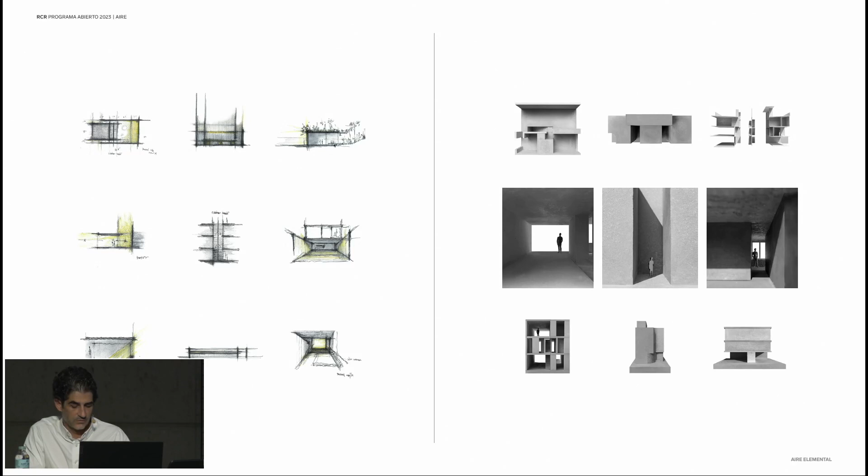To build from a scale will allow us to understand the proportion of the space, the cycles of light and shadow in different angles, the shadows and the angles, the architecture, and also the behavior.

To think with the hand means to perceive the space, to understand the space from all the proportions, to go from the optical to the haptic.

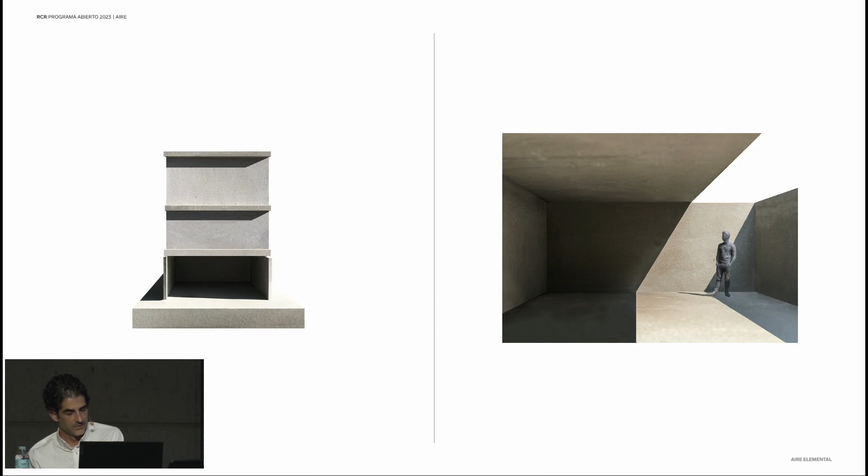Viewing is petrifying, like the Medusa, and it blinds us to changes. And the haptic perception allows us to open the space in movement, to understand in a more dynamic way and in a fluid way everything as a process in time.

Another positive thing that we have in Mexico are these exercises, those accidents that happen by chance. Because in the end, as I said before, the plan is not made on stone, and during the process of construction, we can get committed and we can carry on experiencing, and we can accept these accidents by chance. Accepting them in such a way is like thanking how we can build architecture and how to create the processes that take some time in my country, at least.

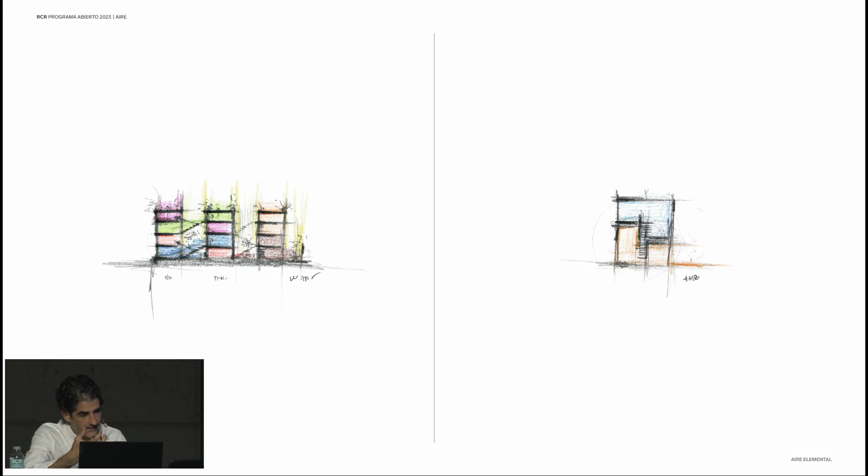In the other exercise that we did, we have different levels, the same anxieties and interests, how to translate and offer this domesticity to these spaces in the second or third level.

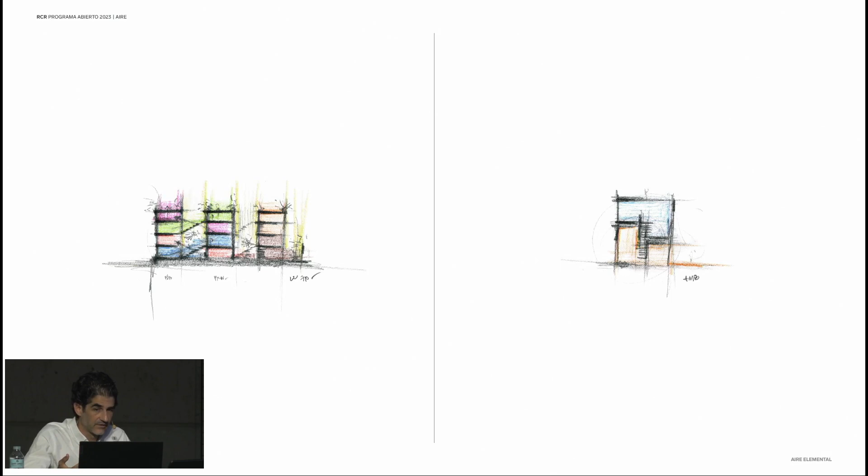And all these extensions towards the balconies, the terraces, through different sliding windows, the flow of the air, the natural light, taking advantage of almost everything, understanding these exercises once again, talking about spaces, patios, and the exercises that

we do with models, and how we understand spaces, and how an apartment is together with another one, and how we can create new buildings, and we build this architecture in a simple way, also creating new circulations.

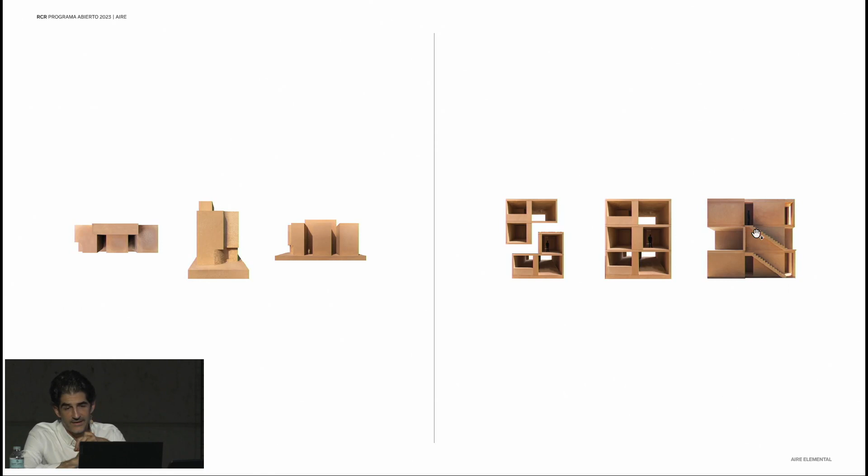When one is up, the other is down, and vice versa. And this is what is really important to me, and this is what is really interesting to me, to see the final result. This is what we were looking for with all these exercises, thinking about this

negative space, these spaces where the apartments can live, not only being light courts — we can introduce nature and include it inside in a natural manner. These are additional square meters that people can enjoy more than the inner spaces. So that's why we can see these first ideas to achieve this.

Fortunately, in Mexico City, it's quite good. We have a great climate and weather, therefore almost the whole year, we can enjoy the nature and the outdoor spaces and green spaces.

If we go back again to talk about the relationship between the inner spaces and the outer spaces, the first levels where the inner space is totally open, and we incorporate it in the outer spaces.

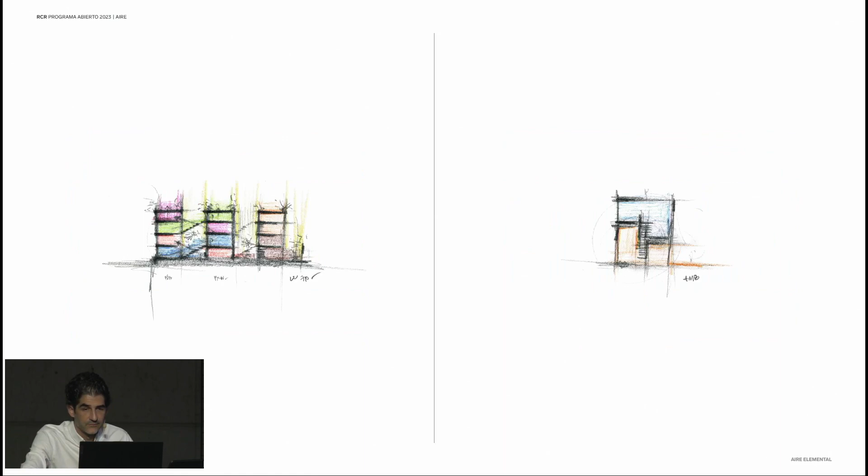And in the other case, in the social spaces, just with an iron railing and a terrace, we were able to enlarge the space towards the outdoor area, as you can see in the previous picture. And the spaces of rooms that go upper, we raise the wall and create more intimacy, and the other spaces are the opposite. Therefore, in the end, we created this facade.

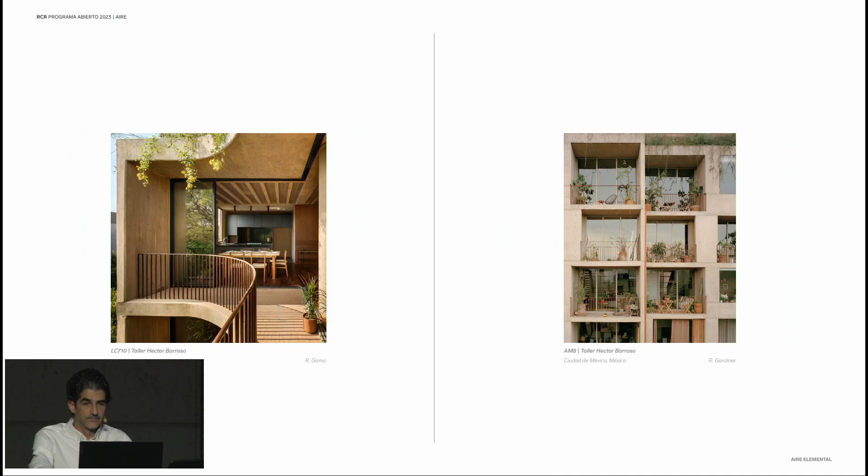I cannot conclude these ideas if I was not constant on my work. Light, the importance of light, and what light can offer to space, creating these atmospheres. I can share some pictures, but what I really want is to mention the intention and the material, the non-physical material such as light, and how this really broadens these limits between the inner space and the outer space, and how it provokes these feelings and different atmospheres.

And finally, I'd like to talk about the territory. The territory is more than an extension of land, more than a vegetal space. It's a heritage that speaks about different ways to inhabit the planet. In vernacular architecture, we have a treasure of different tactics and strategies, know-how, techniques and materials that talk about adaptability and make life possible in different territories. Each and every territory has a different level of implication, a different way of being that must be respected and built in such a way.

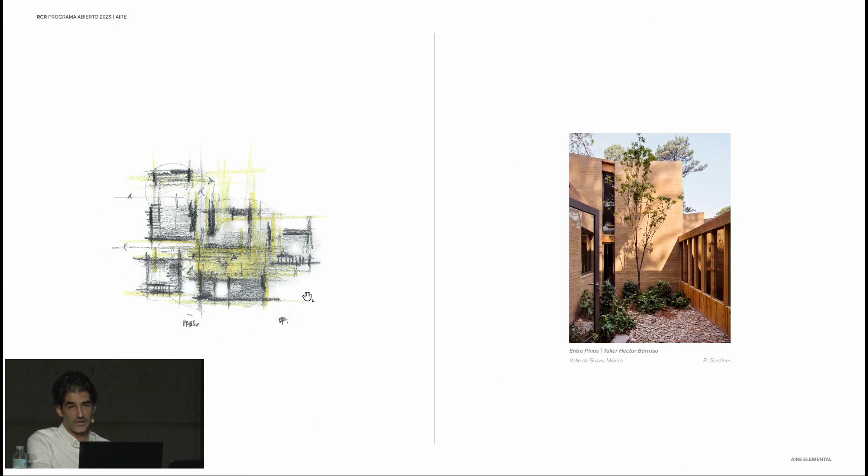We wanted to feel this tension in all these spaces where we could see this connection with the upper level, and the house can be lived and we can circulate without any kind of hierarchy in all the spaces, without any kind of boundaries amongst them.

This was after a month of finishing the project. The picture on the left side, it's almost impossible to take today. This vegetation is five, three meters high, it raises onto here, so it's very lushy.

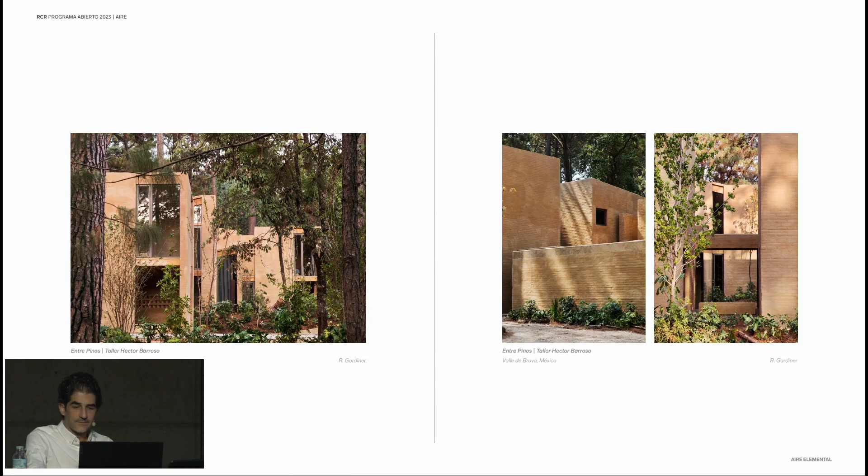The only material that we used mostly to cover and protect the walls is the land, the mud that we mixed together with the cement and offered the tone that we wanted to get to cover the walls, leaving the silhouette of the wall exposed and understood as the main structure behind. As well, the light and the beauty that light really offers all along the day, and all the sketches, the different intentions and the pictures that we took really speak for themselves.

And now we're going to a completely different place. This is in Los Cabos, in the south of the Baja California Peninsula, in Mexico. This is a tennis club, a sports center on the coastline in Baja California, next to the Sea of Cortez.

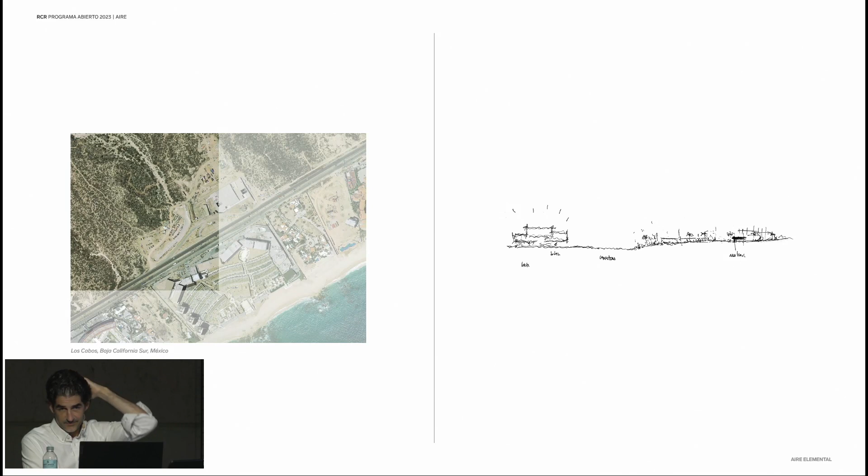The right drawing is the first drawing that I did, sitting in my car, coming back from my first visit to the place. I did it like on a napkin, trying to assimilate what I saw and what I felt before. And well, it goes with this monster, this very stunning thing that is shouting and screaming out.

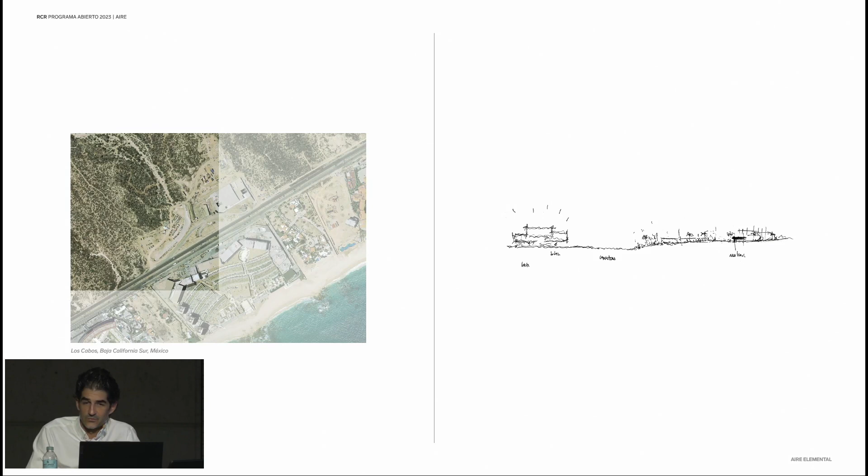The road here, and after that, some vegetation, and some silence - something that we really wanted to create. The main intention of the project was to do as little as possible, to create a silent architecture where we will see new journeys inside, and the visitor will live more than ever the natural beauty and vegetation of the territory, more than the architecture itself.

And calmly enough, this place came to my mind: the archaeological sites. This is Teotihuacan, which really deploys itself inside this plateau in the middle of the country. But what I really like from this archaeological site, more than the pyramids and the constructions themselves, are these negative spaces, the empty spaces that allow us to be immersed in the space experience more than in a voyeur attitude.

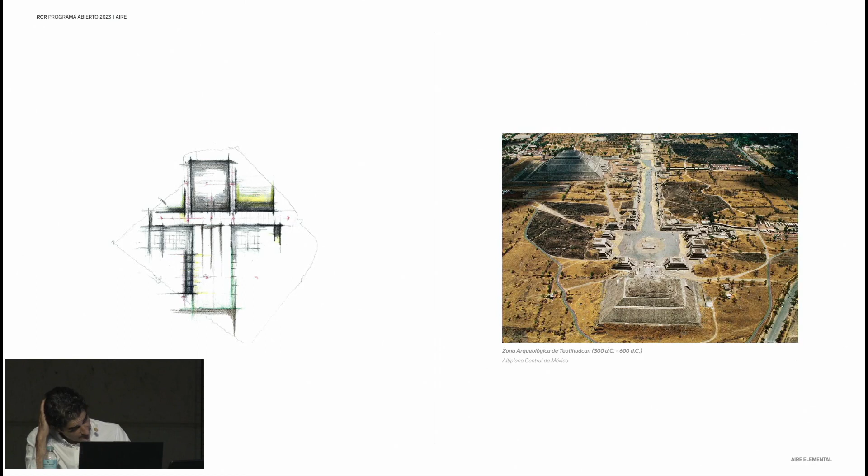So I really liked, and it's really intriguing to me, these empty spaces in the middle of this negative construction. So we created these first ideas, talking about

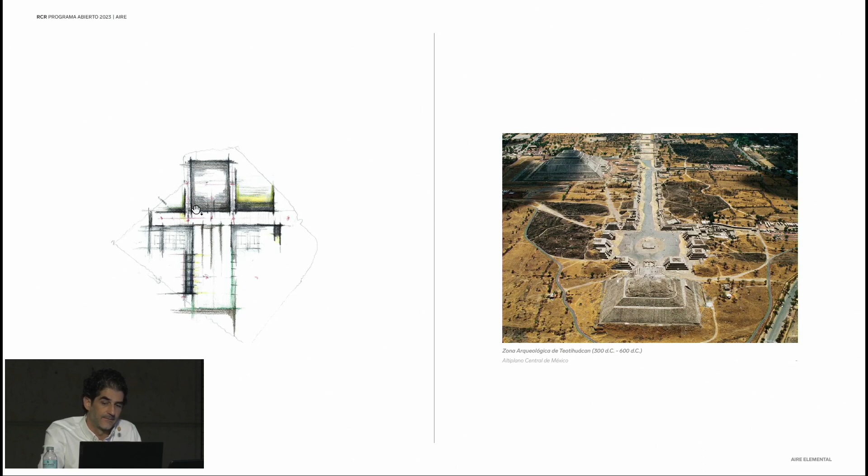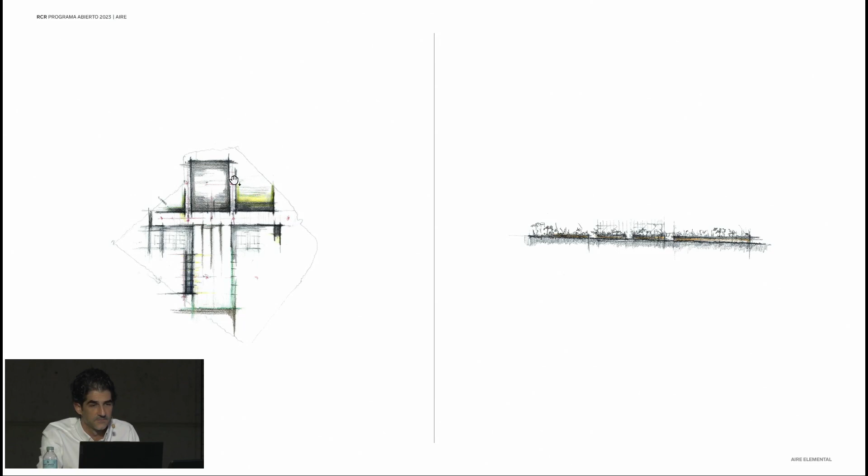this big oasis, the so-called big oasis, where we saw some previous conditions that we had to respect - the north-south orientation that had to fit these tennis courts, and also the east-west axis that we created ourselves. And at the crossroads of these two axes, north-south, east-west, we had to get the architecture from the soil and raise the architecture from the soil.

I'm not going to talk about it too much. The only vertical gesture was at the entrance of the complex. It was like a totem that embraces the attention of the visitor.

We can get it in, and for the rest, this is the silent architecture, walls, empty walls. It seemed that nothing was there.

Once again, we wanted to play with these walls, these spaces, the platforms, always getting support with the orography of the place that had this inclination, and we designed the platforms, walls, stairs, with these upwards and downwards trajectories.

Towards the axis of the buildings, and this clear idea where, in this specific case, what we really wanted was to block completely the southern part and open towards the north. In this desert place, what we really wanted was to completely stop the sun's incidence, and what would be the best way to do it with sand, walls, sand from this place, opening towards the north, towards the landscape, and we can see these two gestures.